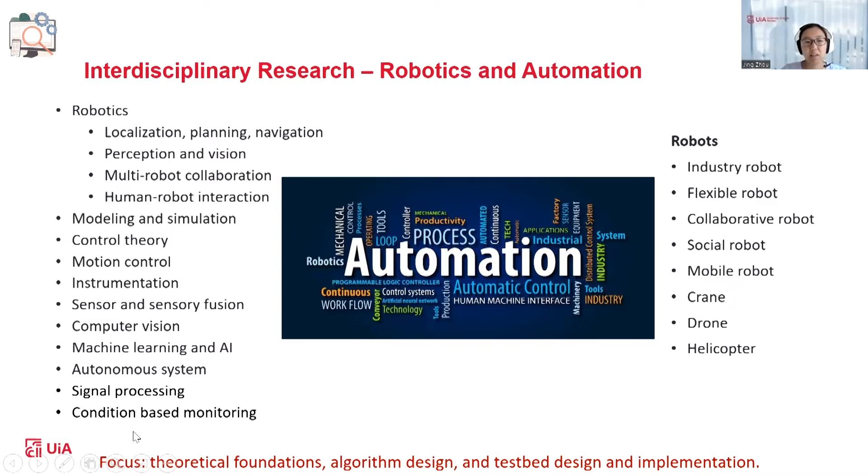For such theoretical research, we have applied robotic technology and control theory to different applications, such as marine crane operations, motion compensation, battery recycling, and industry robot collaborations. There are also other research topics covering computer vision, sensor fusion, condition monitoring, and signal processing.

For the applications of our research, as I mentioned, we are not only doing theoretical research but covering different applications, such as applying robotic theory and control theory to manufacturing, and offshore operations for drilling operations, crane operations, and control of marine vessels.

In addition, we are also working on onshore operations for different industries. For mobile robots, we work on logistic applications, such as using mobile robots to transport goods in logistic manufacturing, and also apply robotics to healthcare and battery recycling.

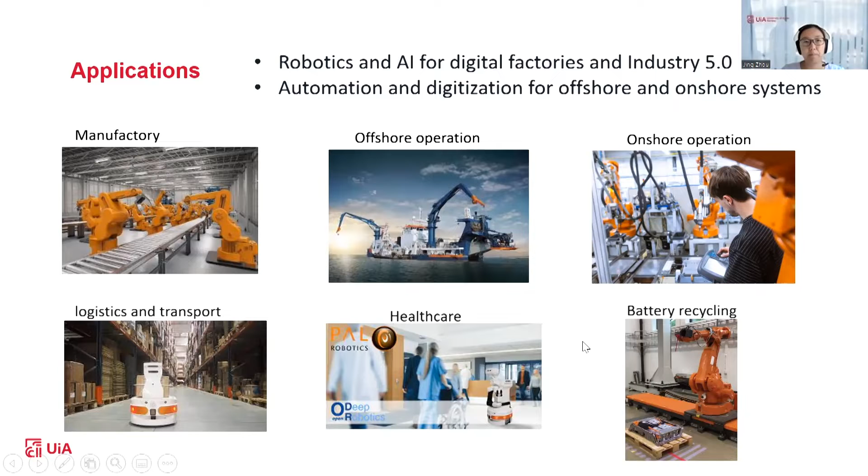Here are some current research projects I'm leading and involved in. The first project is funded by the Research Council of Norway, and it's a large project called SFI Offshore Mechatronics. I'm currently leading Work Package 3, robotics and autonomy.

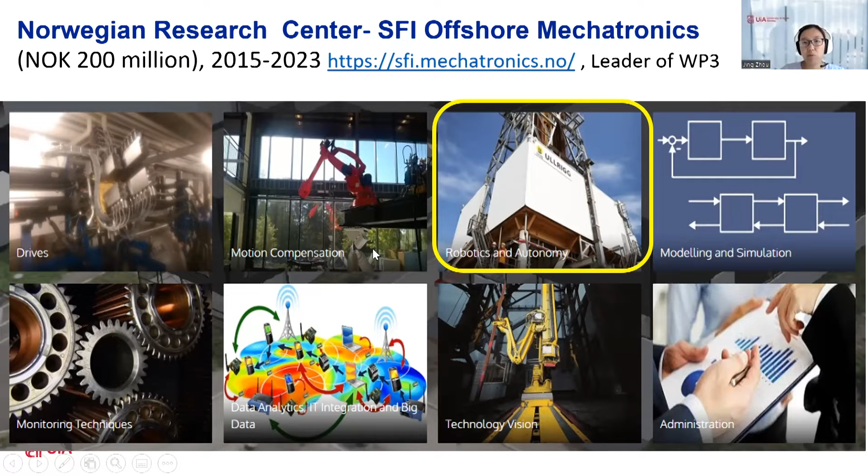In Work Package 3, robotics and autonomy, we work on different research areas covering sensor fusion and perception in order to make the robot see and understand. For robot planning, we currently cover mission planning, behavior planning, and motion planning.

To control the robot, we cover how we can do control through the actuators and sensors. For the control part, we cover not only model-based control but also learning-based control, such as reinforcement learning. For the sensors and modeling part, in order to have better modeling of the systems...

We are not only working on first principle modeling but also using learning-based modeling, such as data-based modeling technology. In order to make robots understand each other and have good communication, we work on communication and networks for the robots. Currently in this work package, we have 9 PhD students working on different topics.

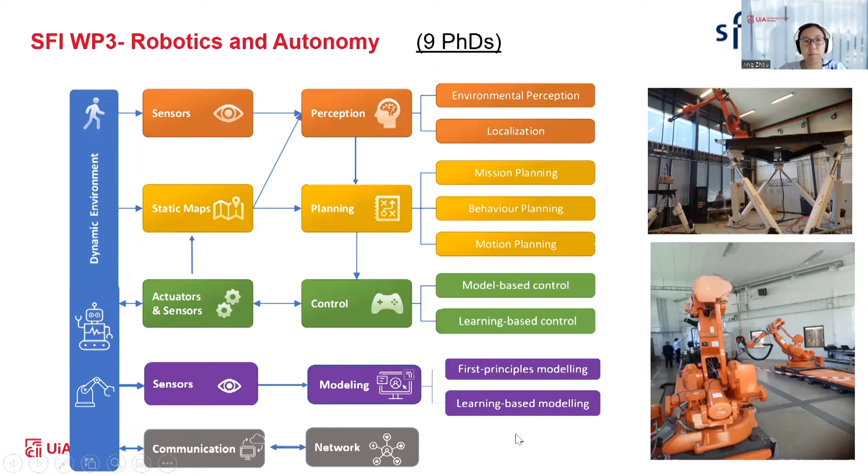Another project is called the Deepcobot project. It is also funded by the Research Council of Norway, and the period is from 2020 to 2025. In this project, we are working on 3 main work packages.

First, we are doing decentralized control for multi-robots. In these figures we have several cases, such as a mobile robot working together with human operators - this is human-robot collaboration. We also have robots working separately and also working in sequence. So there are 3 cases we will consider in this project.

This project is collaborated with industry partners including ABB, Omron, and Mechatronics Innovation Labs. We also have international partners from the USA - University of California San Diego, KTH Sweden, and UNAV from Spain. This project has 3 PhD students and 1 postdoc working on the 3 work packages given here.

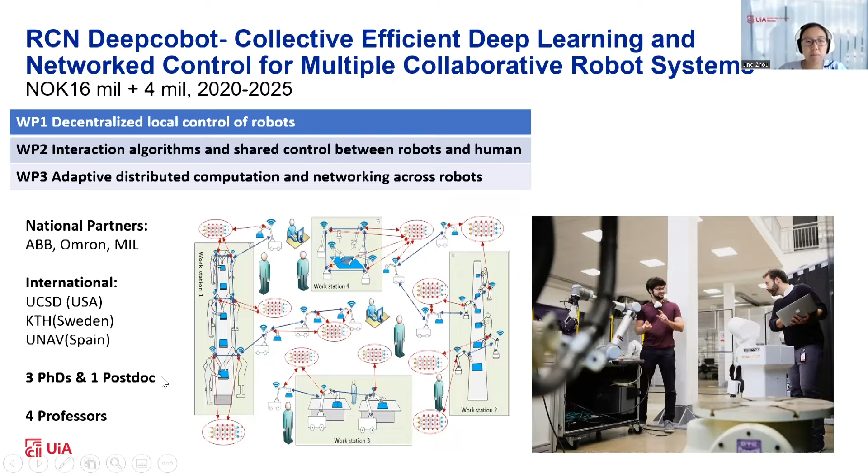4 professors are involved in this project. The main objective of Deepcobot is to design and develop a new generation of decentralized, not only model-based but also data-driven deep learning-based controller for multiple collaborative robots, so they can learn knowledge from each other's experience and from their own previous experience in order to perform cooperatively different complex tasks in a large-scale industry process environment.

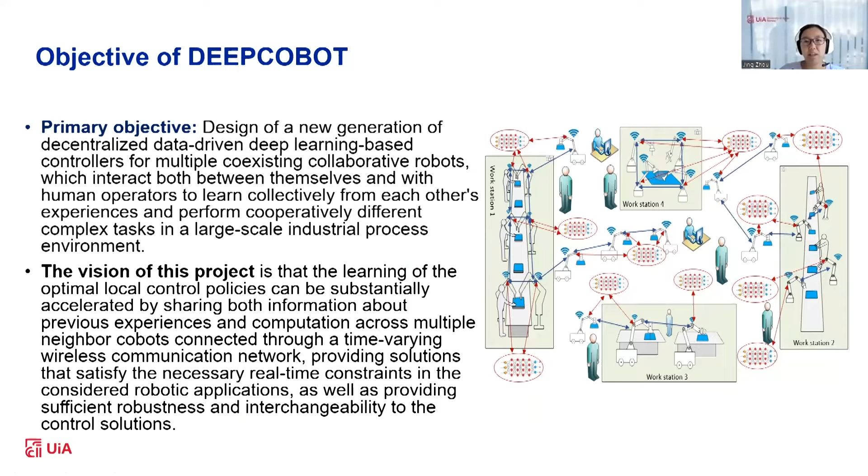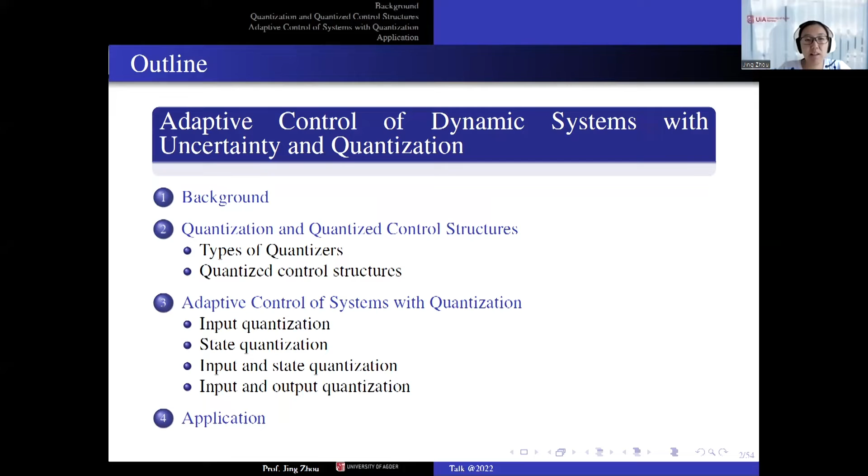Here is the outline of my research talk. In this talk, I will cover the basic background of adaptive control and quantizations. Then we look at different quantized control structures, including different types of quantizers and different control structures. Then we look at control design and analysis. Finally, I will look at some examples and applications.

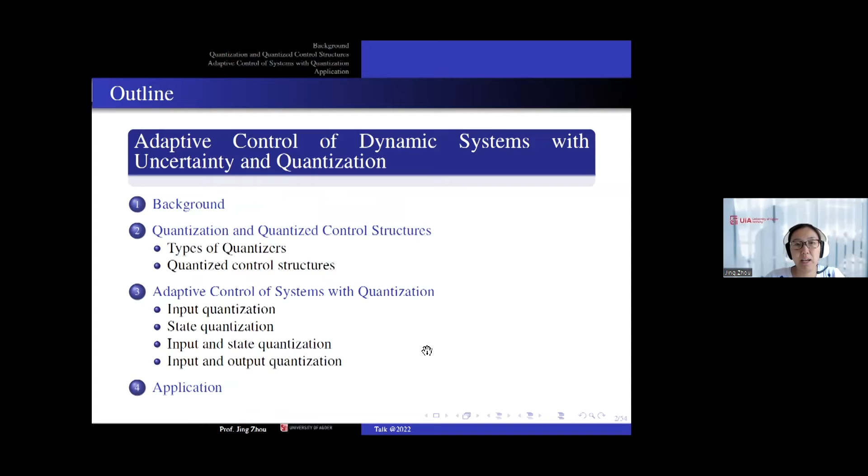This talk is actually based on my currently published book, the first book, published last year, on adaptive control of dynamic systems with uncertainty and quantizations. In addition, I have other books focused on adaptive backstepping control of non-smooth nonlinear cases and actuator failures. If you are interested, you can send me an email and I can send you the PDF file of my books.

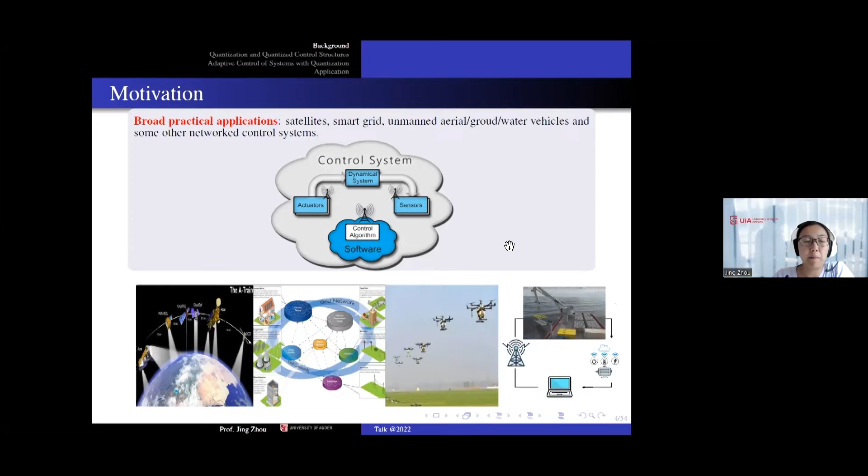First we look at the motivation of this research. As you know, control systems have been applied in many applications such as satellites, smart grids, different kinds of vehicles, and network control systems. But in these control systems, normally you will have actuators and sensors to transport the signals. In order to make the systems better and reduce communications, normally we use quantized signals in either actuators and sensors to limit the signals when transferred wirelessly, in order to improve speed and make the control system better.

The motivation to start this research is that when you use actuators and sensors in control systems, we apply quantizations in either actuators or sensors. The reason is that in many systems you are sharing network cables in order to reduce communication capacity, so you have to use such signals to reduce that capacity. Also, from security considerations, in order to improve security, we are not able to transport all the signals in the networks, so we have to use quantized signals. Also, when you look at actuators and sensors, most of them are digital devices, and for these digital devices you have to use discrete signals.

So this is why we consider quantization in control systems. And then we look at the challenge from the control point of view. There are many control challenges, such as how we can compensate the sensor and actuator information when you are not able to get all the signals. You only have the limited information from the sensor and actuators.

And also for such control systems, you always have nonlinear characteristics, meaning that the system is not always linear. So you have nonlinear functions in your systems, and we need to design a controller to deal with such nonlinear characteristics.

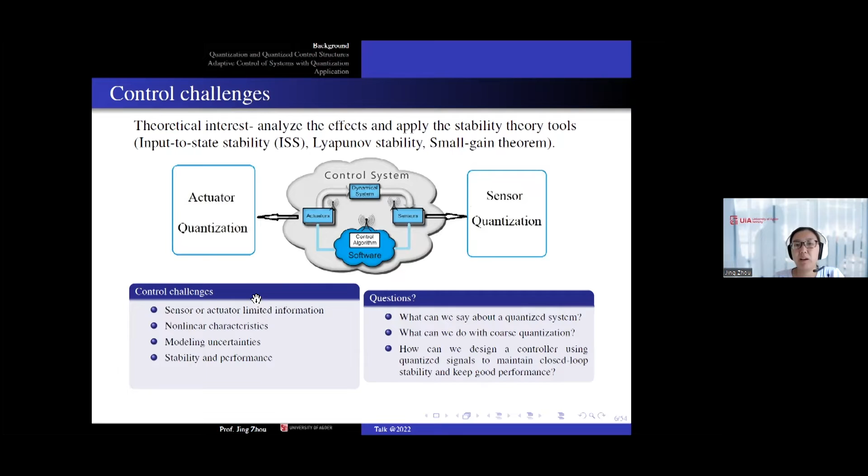So what can we say about these systems? What is such a system? And what can we do with this limited information, such as with quantizations? Also, the third question is, how can we design a controller using only the quantized signals to maintain closed loop stability and keep the system performance as good as a system with continuous signals? Those are the questions and challenges I will introduce later.

In order to compensate for and solve the system with uncertain parameters, the most popular controller is called adaptive control. That means if you have some uncertain parameters or uncertain functions in your systems, you can use the adaptive control method to solve those uncertainties.

In this talk, I will apply adaptive backstepping technology to design adaptive control for control systems with uncertainties. Since the system has uncertainty in parameters, you need techniques to estimate those uncertainties. There are also modification techniques to improve the robustness of the adaptive controller, such as normalization, dead zone, sigma modification, and projection.

Then we look at different types of adaptive controllers. According to different classifications, you can divide adaptive control into direct adaptive control and indirect adaptive control, based on the procedure for obtaining the control parameters. Either you directly obtain your control parameters when you design your controller, or you obtain the control parameters indirectly based on estimated system parameters.

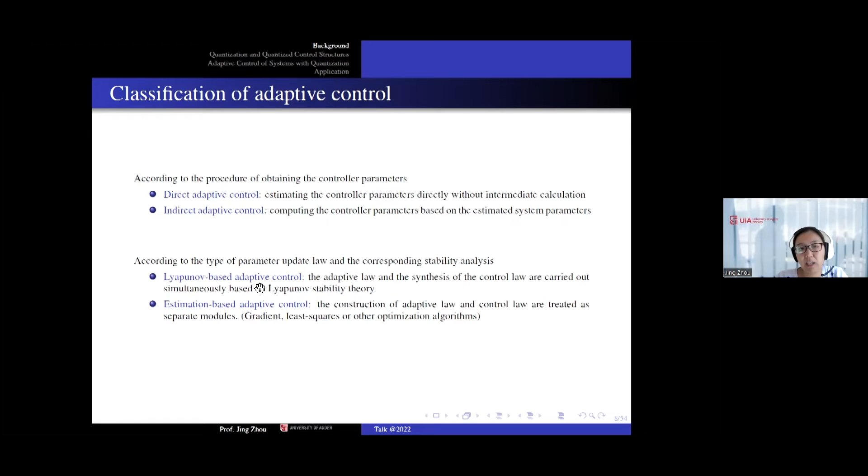So backstepping control is actually a Lyapunov-based adaptive control method, and it is also a direct adaptive control method. Then we'll move on to quantization and control structures.

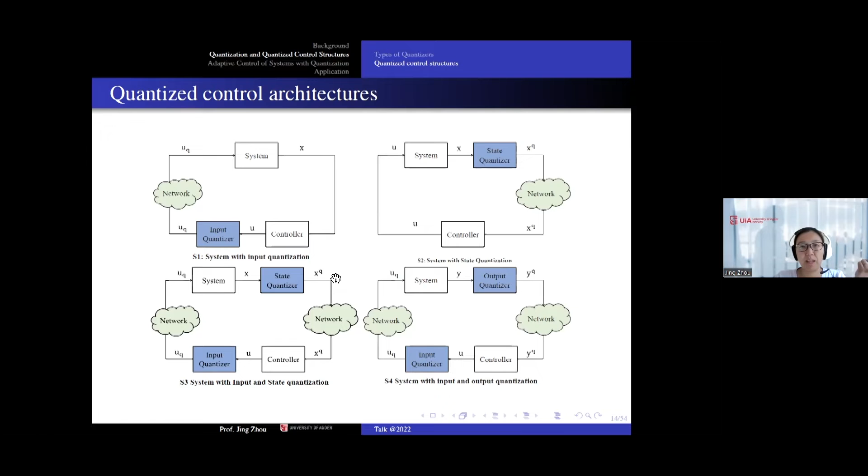Sometimes you can have both input and state quantizers - this is a third case, system with input and state quantization. The last structure is that in your system, not all the state X is available, only the output signal Y is available, and Y passes through the quantizer to your controller. In this case, you have a system with input and output quantization. These are the four structures we will consider in this book.

Then we compare state quantization and input quantization. For input quantization, you can see that all the states X are available, meaning you can use all the states X in your controller design U. Only in the stability analysis do you have the quantized input U to do the analysis.

So the difficulty is how we can compensate the effects from the input quantization. But for the controller design, it is still a continuous system - you can use all the states.

Then we look at state quantization. Since we have the quantizer after the states, when you design your controller, you can only have your quantized states XQ. So this is one challenge - how we can compensate the effects from the state quantization.

Since in adaptive backstepping control you need all the states to be continuous, but when you use the quantized states, you actually generate a discontinuous signal. So how can we design a controller to compensate for those non-differentiable quantized states? This is a second challenge.

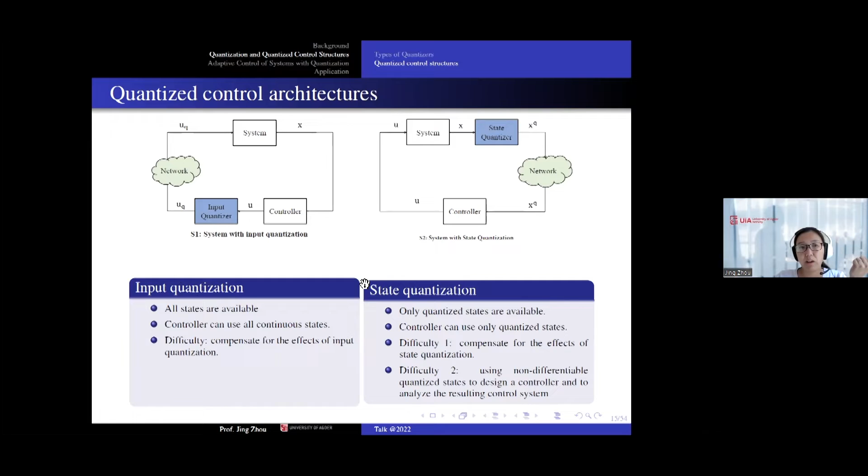Compared with input quantization, the design for systems based on state quantization is much more difficult than for input quantization.

Then we look at the controller design. For the controller design, I will go through input, state, and input and output quantizations. For the technology, I will use the backstepping technology. If you are not familiar with backstepping, I'm not sure.

I will quickly go through what is a backstepping technique. This is the basic structure as I showed before. We have only the input quantizer after the control U.

The objective is that we have the input quantization, meaning in your system you only have the quantized input to control your system. Our objective is how we can stabilize the system and make the output Y track the reference YR. The difficulty was introduced before.

Since the Q(u) is a quantized input, how can we compensate for this quantized input? We also have the nonlinear dynamics in the system, psi and phi n, and an uncertain parameter vector theta, which is a parameter vector.

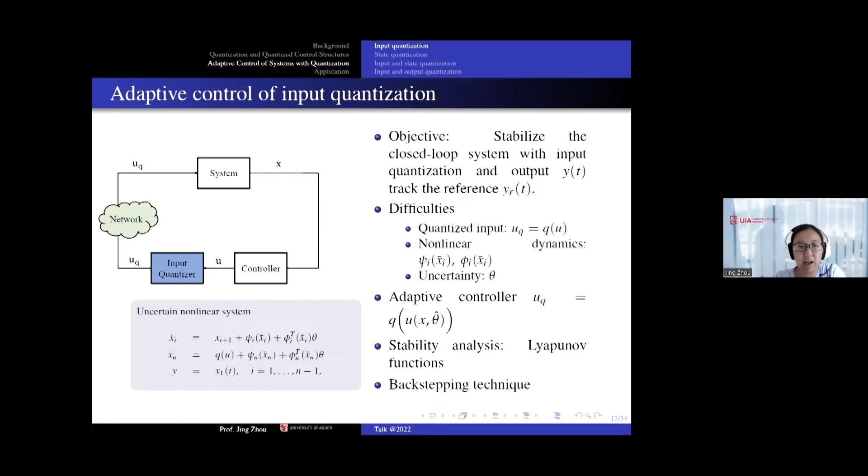In each differential equation, xi dot, you have only xi plus 1. This is your next state. In addition, all the psi i and phi i only include the states from x1 to xi. So this is a kind of triangular parameter state structure.

In the backstepping technique, we base the design on how many differential equations you have. For example, in this system we have n differential equations, each first order. This means the controller will need n steps, based on how many orders your system has.

For each controller design, you just look at the one single differential equation corresponding to each step. For example, in step 1, we just look at x1 dot. What is x1 dot? It's just related to your x1 and the reference.

We look at the first differential equation x1 dot and use the Lyapunov-based technique to try to design a virtual control, called alpha1, which can stabilize your first order differential equation.

Corresponding to step I, you will have your virtual control alpha I, which can make sure all the previous I steps are stabilized.

In the last step N, you will have your quantized signal QU, and in this step you generate your final control U, and also generate the adaptation parameter law, which is used to estimate the unknown parameters theta hat. The advantages of the backstepping technique are given here.

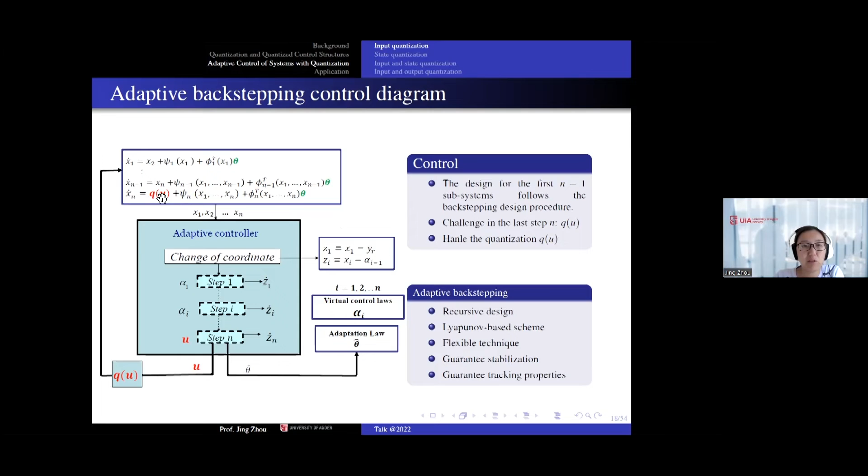Since the QU is only in the last step, the challenge is only on the last step. All the previous n-1 steps are actually the same as normal backstepping technique design. Only in the last step do we have the quantized input, so we have to do some modification in the controller to compensate for these effects.

In order to compensate for those quantized inputs, we use tangent hyperbolic functions in U, which is your final input. Here you have zn and un.

Un is called a virtual controller, designed here. In Un, you will also find another tangent hyperbolic function, which includes your last state, zn, and mu is your quantization parameter.

In the parameter estimation law, we introduce a sigma modification by compensating the uncertainties and the quantized states. The stability analysis is based on the Lyapunov technique. We construct a normal Lyapunov function, including all the states, zi, and the parameter estimation theta tilde.

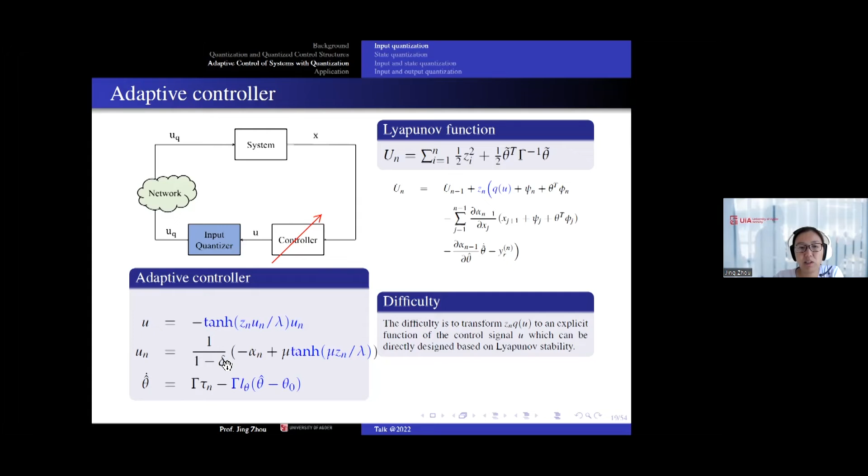By using this kind of design, we are able to compensate for these effects, which we will look at. In order to compensate those quantized states, in this lecture we consider the quantizer to be sector bounded, meaning the quantization error is not bounded, but it is sector bounded.

It's a more general quantizer. By using the tangent hyperbolic functions and the sector bounded properties of the quantizer, we can transform zn times QU. The challenge is that U is inside your quantized signal, so how can we bring U out from the quantizer so we can design it directly?

By using the property of the sector bounded quantizer, we can transform zn times QU into a function of zn times U. Then we can separate U outside from the quantizer. We then use our designed controller by using the properties of the tangent hyperbolic function and our new controller design.

We can transfer this part directly with the virtual control UN. Based on the normal standard backstepping technology, you design the UN in order to compensate all the nonlinear dynamics in your systems. So this is a key technology used in this controller design.

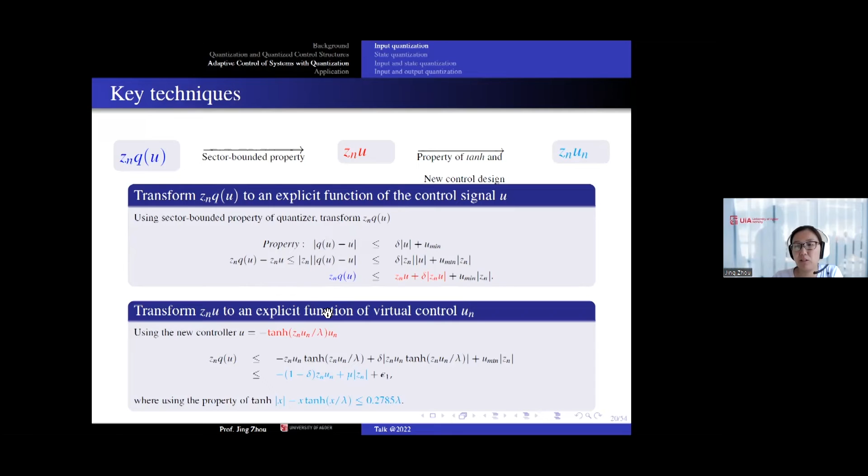And then the Lyapunov stability. I will not go through the details, but using this technology, you get the last equation and inequality as given here: UN dot is less than minus F1, a positive constant, times UN plus M1. This shows that all the signals in your UN are bounded.

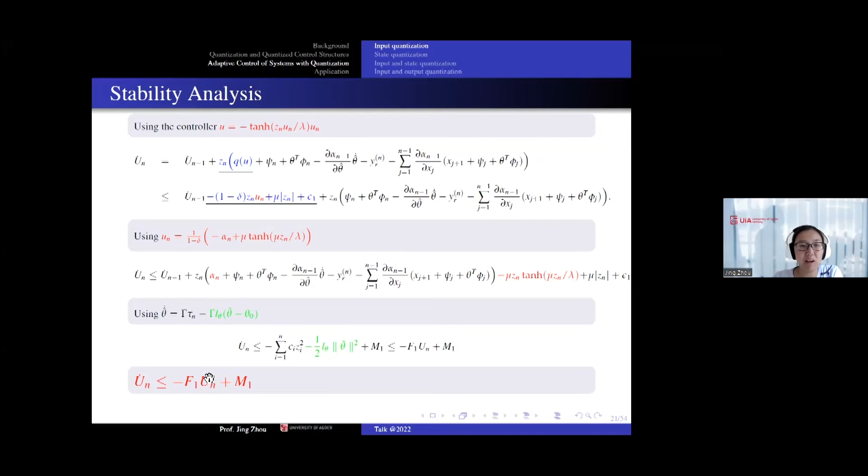You will be able to generate the following theory: we can guarantee all the states in your closed loop systems are bounded. We can also generate the tracking error, which is bounded by a constant B1, where B1 is based on your initial Lyapunov function and also based on M1 and F1. M1 you can see here is based on the quantization parameters and your initial state theta 0, and F1 is based on your control parameters.

C1 to Cn is your control design. It means you can tune your control parameters and tune the quantization parameters to reduce this tracking error B1. So it means the tracking error can be tuned by designing control parameters and the quantization parameters.

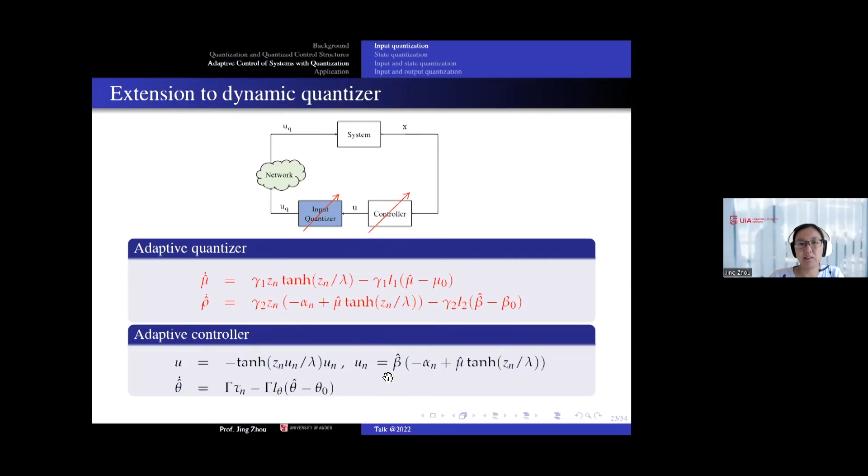We also extend our result to the dynamic quantizer, meaning your quantization parameters are not exactly known. You can design the quantization parameters in parallel with your controller design. To design this dynamic quantizer, we use some parameter estimation laws, mu hat and rho hat, to estimate the quantization parameters. So mu hat and rho hat are estimates of the quantization parameters, and the controller design is actually the same as the previous fixed quantizer.

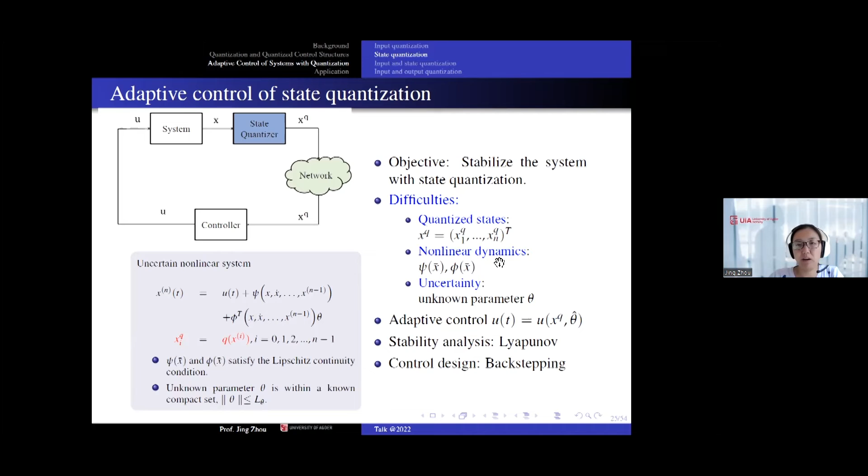And then we move to the state quantizations. For the state quantizations, as I said before, the challenge is that in your controller design, you can only use the quantized states, xq. In these systems, we also consider we have the nonlinear dynamics and uncertain parameter theta.

Let's look at the challenge. When we use the backstepping controller design, we need all the system states to be continuous in order to generate the differential derivatives in the following step. But when you have the quantized states, such as here, in the first step, we only have the quantized states, where X1Q represents your quantized states. As we know, the quantized state is not smooth continuous.

It is actually discontinuous. So when you take the derivative of alpha1 dot, since this x1q is not smooth continuous, it is not differentiable. So how can we use such quantized states in the backstepping design to design the controllers? This is a challenge: how we can solve this non-differentiable virtual control function to guarantee the stability of your systems.

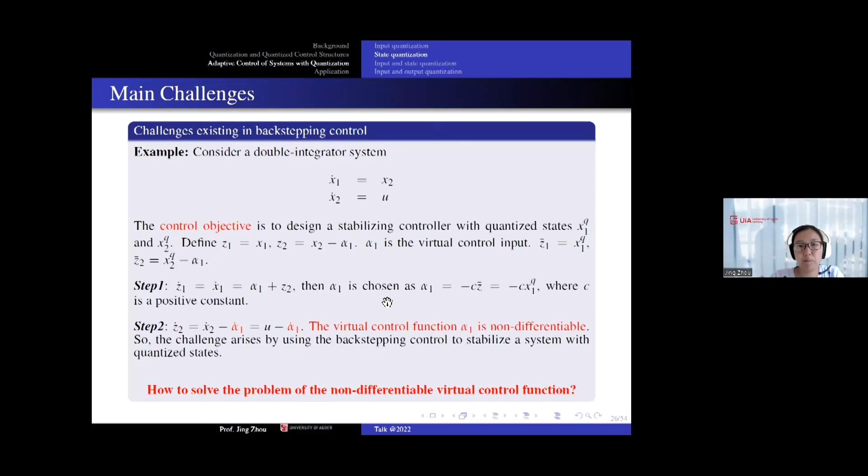So the key design technique is given in the following design procedure. First, we just assume we have the system with continuous states. Then we follow the basic backstepping technique to design our virtual control and final control U. And then we keep these partial derivatives unchanged. So this is all step 1.

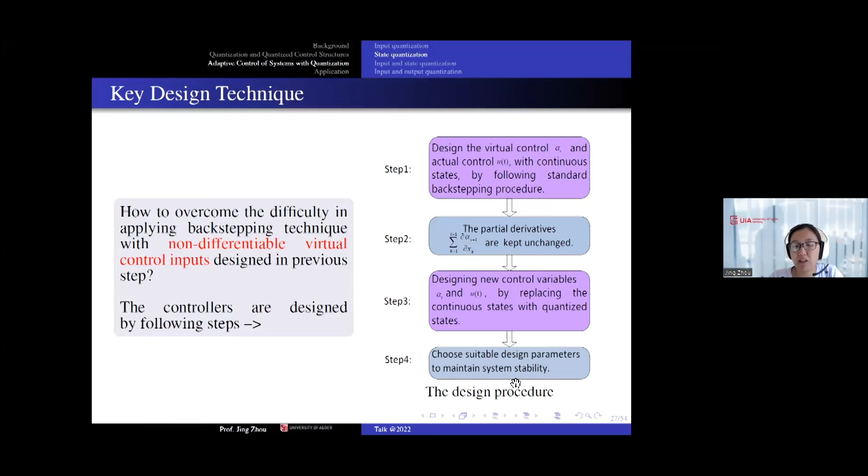Step 2 means we consider continuous systems without quantization signal, then design controllers and calculate the partial derivatives. Then we move on to the quantized states. We design the new control variables alpha-i-bar and u, by replacing the old continuous states with the quantized states—meaning you use xq to replace x from your previous steps. Then we choose suitable design parameters so we can guarantee all the systems are bounded and maintain system stability. And then we arrive at this, our final control.

The control structure is actually similar to the normal backstepping technology; we just replace xi by its quantized state. Meaning we replace x1 by x1q, which is your quantized state. And we keep these blue terms—this is a partial derivative that stays continuous, so this part doesn't change. If you calculate this partial derivative, you actually get a constant.

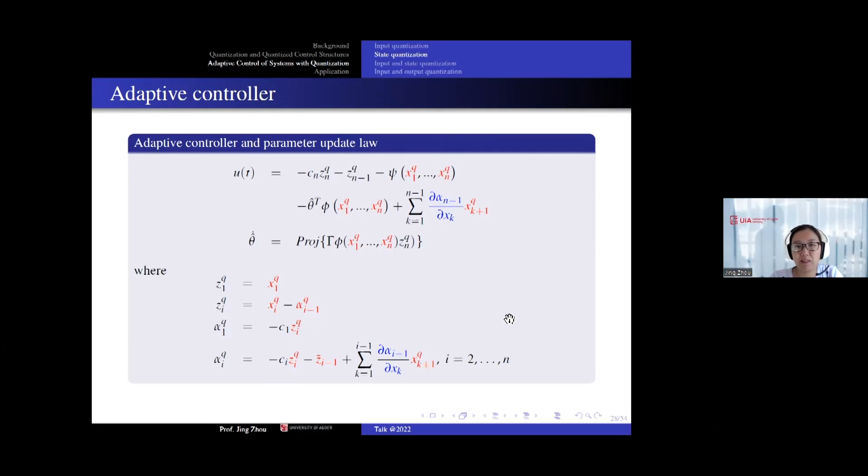In the parameter estimators, to guarantee all the parameters are bounded, we use a projection to guarantee all the parameter estimates are bounded. The virtual control laws are the same, just replacing the states with their quantized states. Then, to tackle the challenge, you have to use some preliminary results based on the relationship between the quantized states and the function without quantized states. So the first lemma will generate the relationship between the function with quantized states and without quantized states.

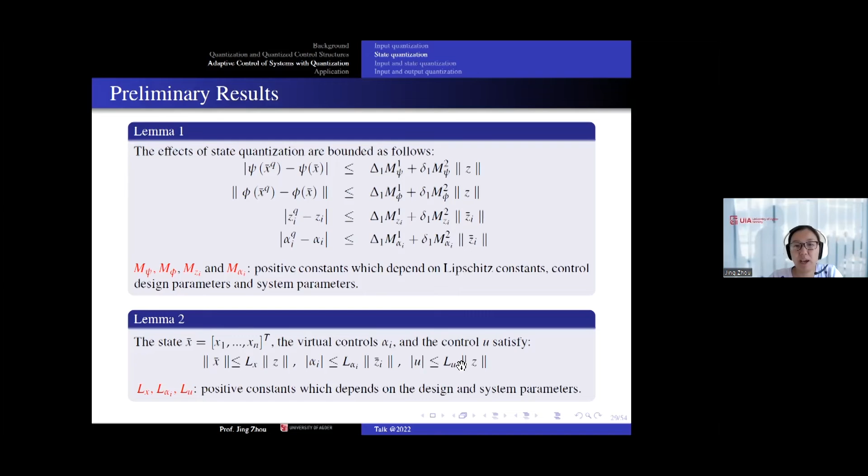We generate the following inequalities, and lemma 2 is we relate our states with our virtual control Z, so we get those relationships. Then based on lemma 1 and lemma 2, we choose the Lyapunov function as the same as previous.

With input quantization, then we can replace the quantized states, get the relationship between the virtual control alpha q with your original alpha i, and we have the relationship between x bar, which is your continuous states, and the x bar q, which is the quantized states, and similar.

Then based on lemma 1 and lemma 2, we can guarantee the last inequality shown in the last line. Then we can guarantee V dot is less than all the states Zi, which is minus, plus M is a positive constant. Then we can show that all the states Z are bounded. Since the theta hat we use projection, we can guarantee all the Zi and the parameters theta are bounded.

Then we get the following theorem, which shows that by using such kind of controller design, we can guarantee all the closed loop signals are bounded, and also we can guarantee the stabilization error, that is also the tracking error, is actually bounded by a constant M and theta. And M depends on your design parameters, system functions, and quantization parameters.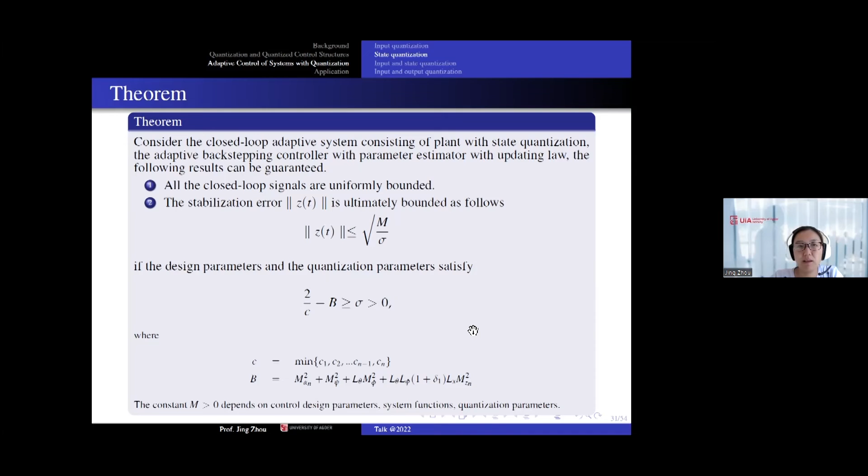And sigma is actually a parameter. You have to choose your control parameter C, which is the minimum of all your control design parameters, satisfying these inequalities. This is a condition we have to satisfy in order to guarantee the stability. So this is for the system with state quantization.

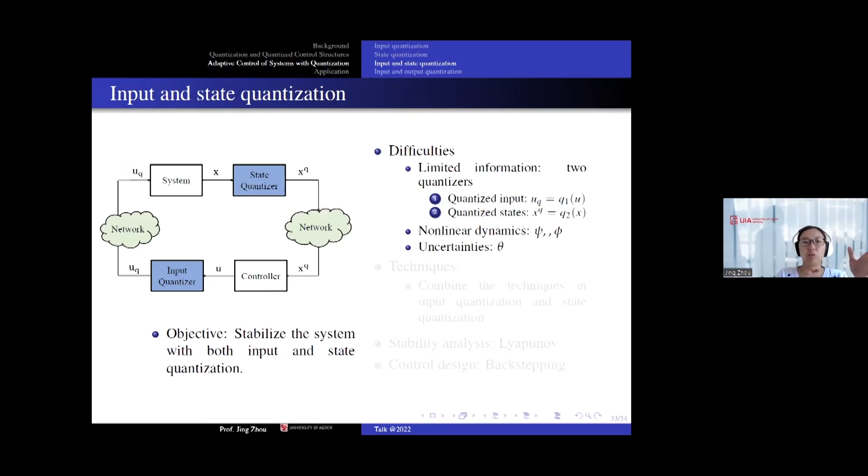Then we look at the last two cases, which is combining input and state, and input and output. For the input and state quantization, I will not go through the detail. It's actually combining all the technology for the system with input and the system with state. Then we combine them together, we can design a controller to compensate both input and state quantization.

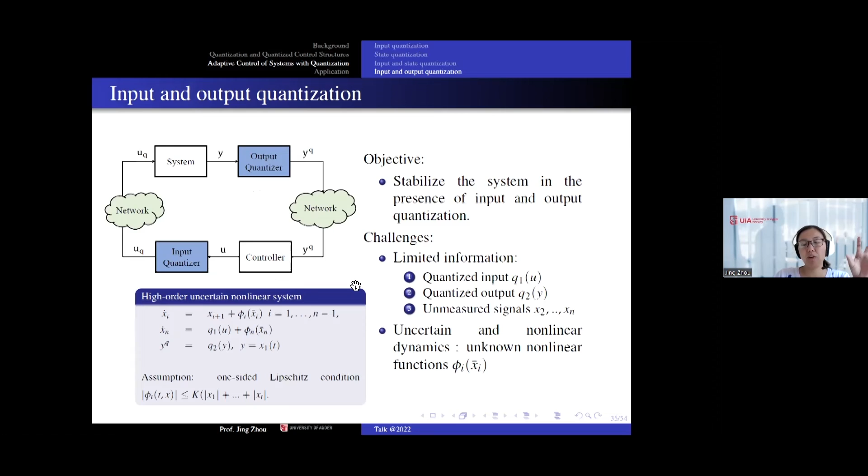And for the input and output quantization, since in this case we have only the output signal Y available. But in our systems, we have the states X1 to Xn, but X2 to Xn are not available. So in order to design the controller, you have to use an observer to estimate all the states which are not available. So we will combine the observer design and the input and state quantization technique to design the controller.

And the design of the observer-based adaptive controller is based here. First, you have to design an observer to estimate all the states X. Then you will generate this X hat, which is the estimate of your unmeasured states. Then you will use X hat in your controller design to generate quantized input and state quantization to compensate both input quantization errors and state quantization errors, and also combine the observer design.

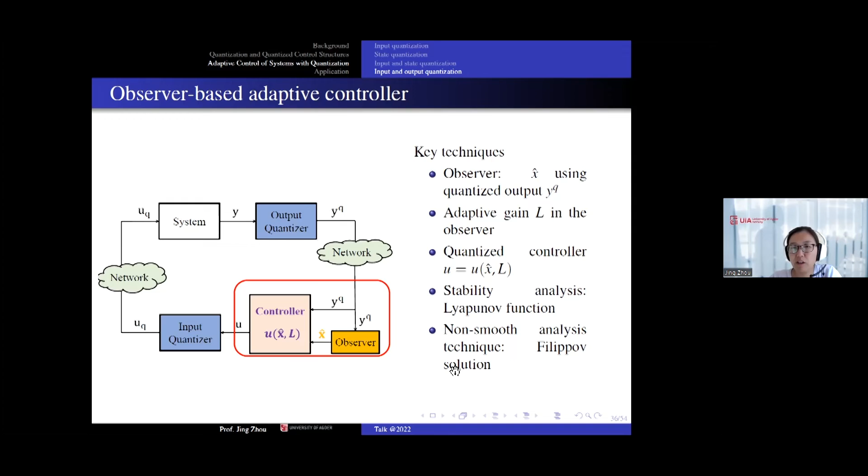And since in the observer design you have YQ, which is your quantized output, and since YQ is not smooth continuous, in the observer design we will use the non-smooth analysis technique. It's called the Filippov solutions to do the stability analysis.

And then we can see that both the controller and the observer actually include the parameter L, where L is a parameter which is estimated by using these differential equations. So this is a controller including the observer and the parameter estimation law, which are combined together. So it means that the observer and the controller are designed simultaneously, not separately, and are connected together.

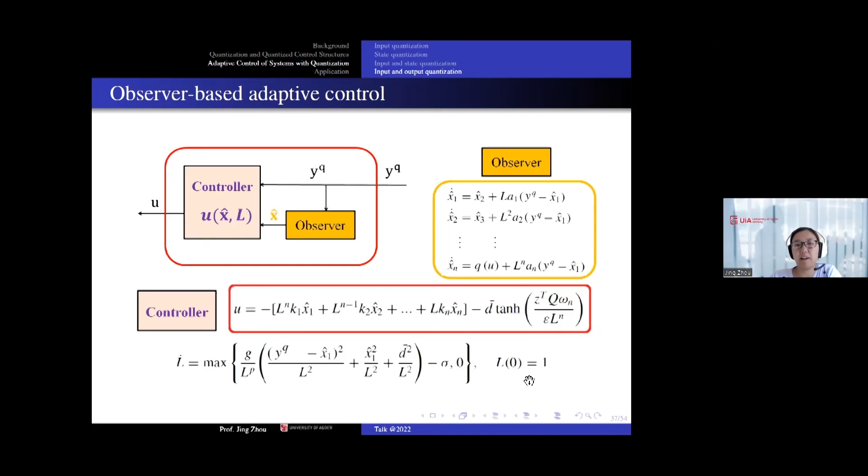And finally, in the stability analysis, we have to consider several Lyapunov functions in order to guarantee that all the system states, parameter estimator, and state estimator are bounded. First, we include the Lyapunov function V, which includes the state estimation error and the system states, in order to prove that L, which is the parameter, is bounded.

And then we consider the second Lyapunov function, which is used to prove the state estimate Xi hat is bounded. Then we have the last Lyapunov function, which is used to prove that all the rest of the states are bounded. So 3 Lyapunov functions are considered in the stability analysis, and finally we can show that the system estimate output Y is bounded by these parameters.

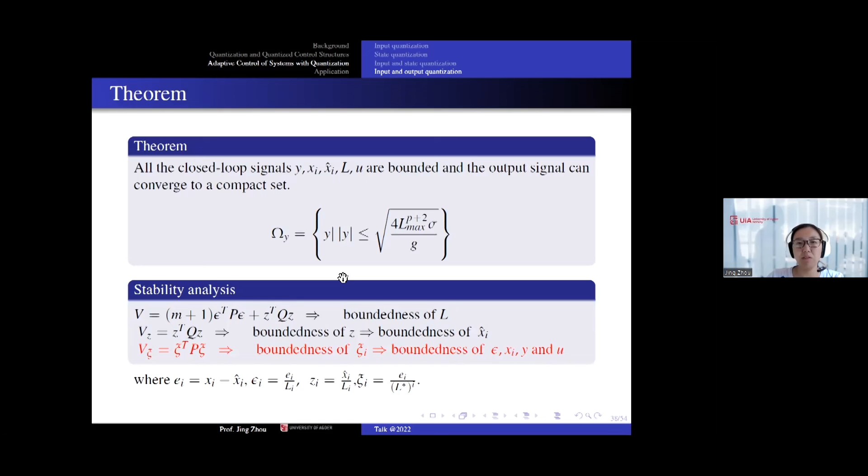And then we also apply our theoretical research to some real applications.